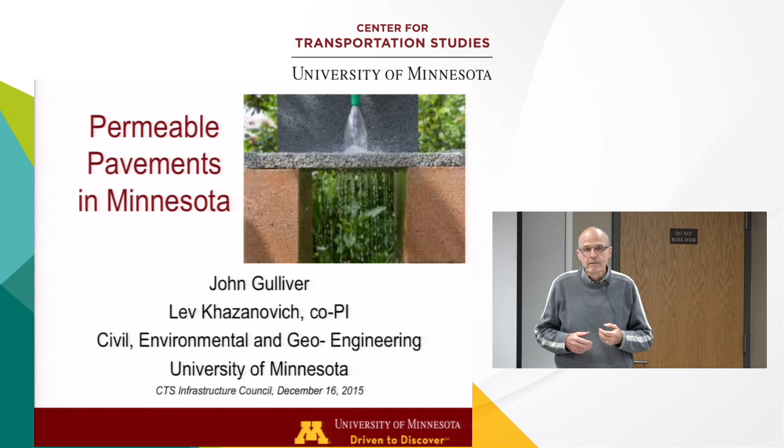I hope that what you're going to take away from this presentation is, number one, a well-designed, well-constructed, and properly maintained permeable pavement is definitely a possibility in Minnesota. We have examples of that. Number two, there are compelling reasons to use permeable pavements in Minnesota. Those two things I hope you take away. If you take nothing else away, that would be good. I'd be happy. So I'm going to give you a little bit of review. Many people know this stuff, but I'm going to give it to you anyway.

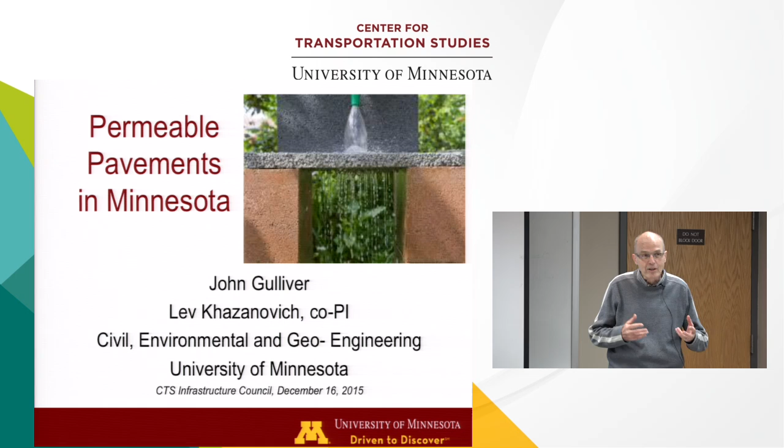I need to mention, Lev Khazanovich and I are co-PIs on this project. It's not just my project. Lev is here. He did the structural side of permeable pavements, and I did the hydraulics side, and we combined our efforts on the rest of it.

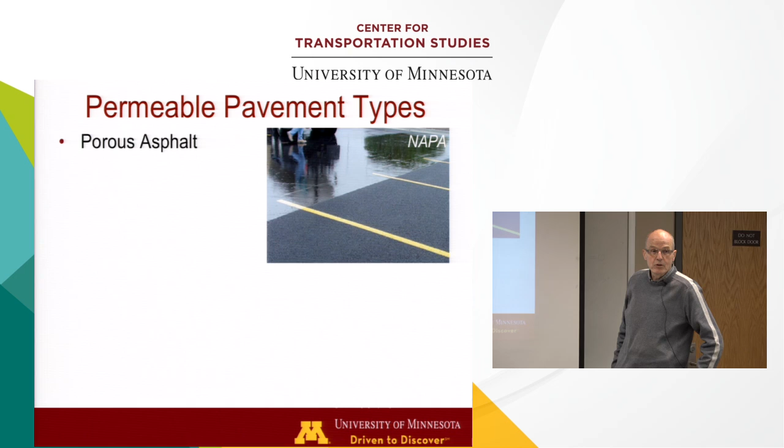So I like to talk about permeable pavements. There's porous asphalt, which is, I think, a little bit of a misnomer because all asphalt is porous, but that's what they use—they use the term porous asphalt. There is pervious concrete right here. I'll mostly be talking about those two.

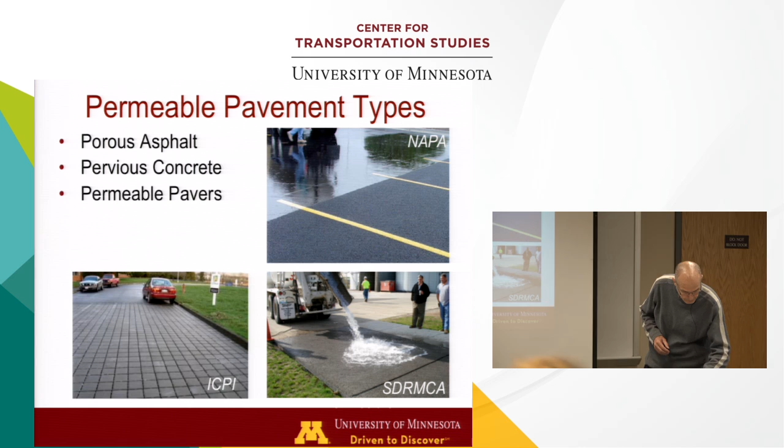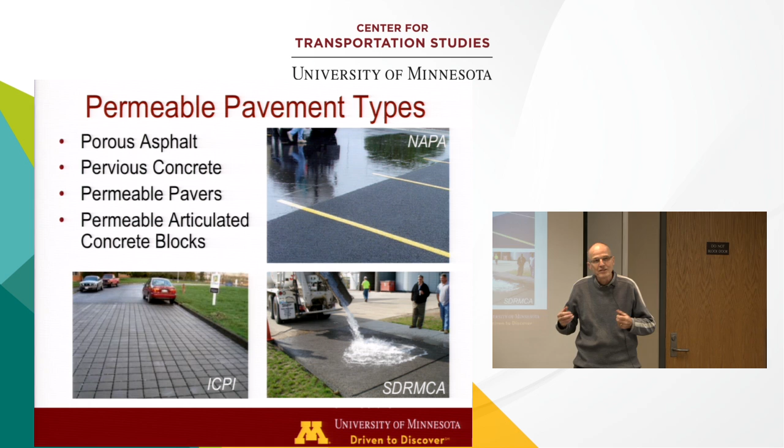There are permeable pavers where the spaces in between the blocks are filled with some sort of permeable material. And then a separate category is permeable articulated concrete blocks, which are just permeable pavers held together by some rebar. They're a separate category because in our project, we had someone from the Interlocking Concrete Pavement Institute, and they didn't want articulated concrete blocks to be part of it since they aren't part of the ICPI. So we gave them a special category—one way to solve that problem.

So, a cross-section of a full-depth permeable pavement. I like this picture because it's kind of descriptive—you can see the size of the car here. You have 2 to 4 inches of permeable pavement, with some aggregate underneath it. The water goes right through the permeable pavement quickly, hopefully quickly, into the aggregate, sits in the aggregate, and then soaks more slowly into the subgrade.

This filter fabric, I don't think, is really necessary. If you do need to use a filter fabric to keep the subgrade from moving into the aggregate, you probably want to make sure that it is fairly porous, because the last thing you want is filter fabric at the bottom of your whole system clogging. And so they always put filter fabric at the bottom, and sometimes I wonder why.

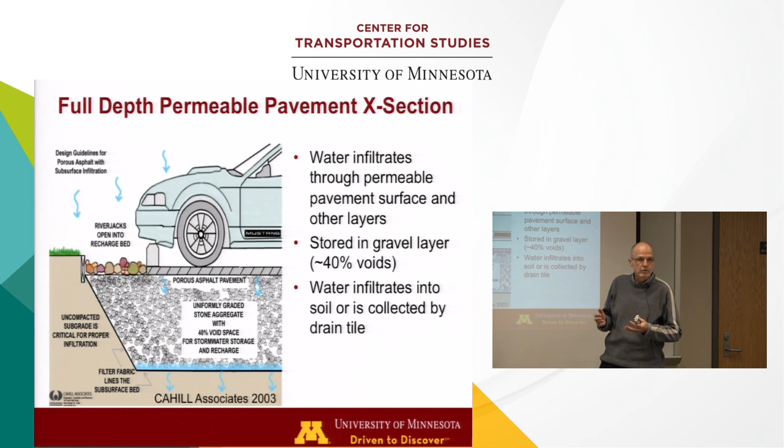The other thing about this is that you want to store, roughly in Minnesota, approximately 2 inches of water. Well, this looks like about 3 feet of stone here, at 40% porosity. But 2 inches of water only requires 5 inches of stone. So this—and typically people over-design the stone with 12 inches and sometimes 18 inches—is way too much stone. You need much less aggregate than that. It'd be about that deep, and that would still be an over-design, a conservative design.

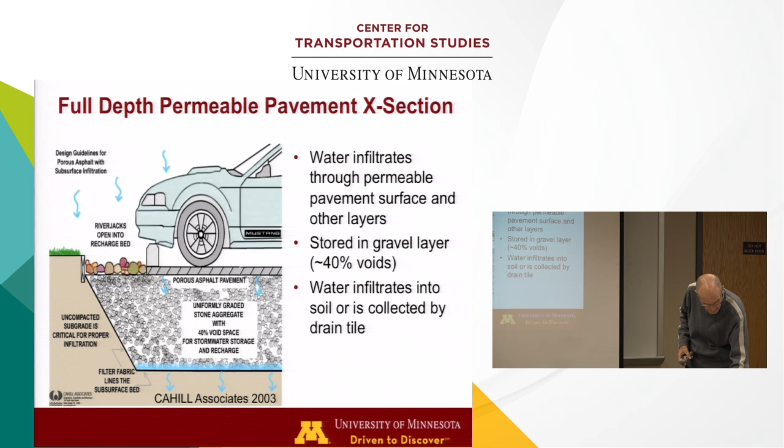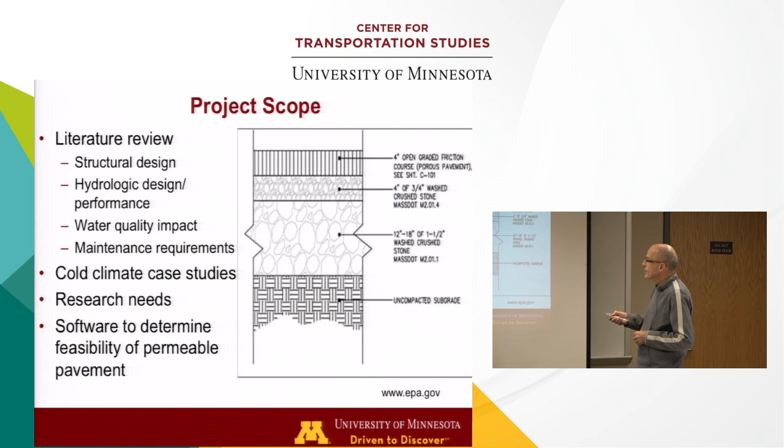So the project scope was we did a literature review, structural, covering all these topics. We did 9 cold climate case studies from the literature, and we found these cold climate case studies from interviews and talking to people. We published those, established some research needs, and developed software to determine the feasibility of permeable pavement. I'm going to talk mostly about these two: cold climate case studies and literature review, and move in some of the research needs where appropriate.

I'd like to talk a little bit about the benefits of permeable pavements. There are many of them, and they are significant. They're related to safety, water quality, noise reduction, and I'll talk about one a little bit more here.

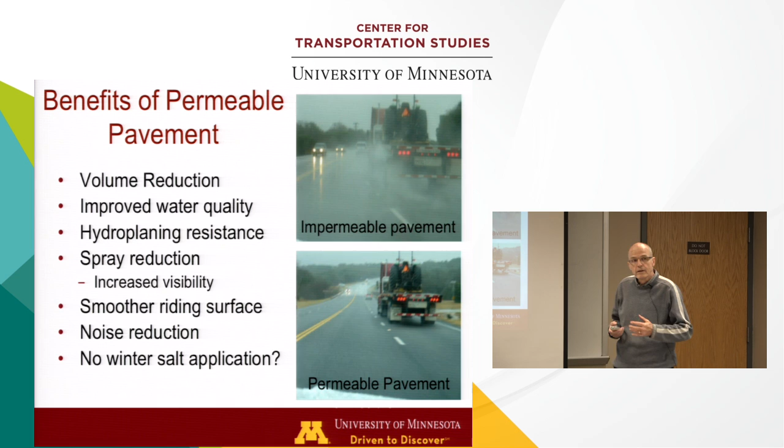Volume reduction is about volume of water quality. That's taking the pavement back to the way we handled water with forests and things like that. The water soaked into the ground and then moved through the ground to a stream or a lake, instead of hitting the surface and running into a storm sewer straight to the lake.

So it slows down the water quite a bit, and volume reduction is a big deal in stormwater pollution prevention. Improved water quality is pretty small, but you improve the water quality if you have water running off, by filtering a little bit of the particles.

Hydroplaning resistance is huge for safety. Spray reduction, you can see the spray reduction here. I hope you can see it because it's pretty substantial. You hear this truck, you can hardly see the truck with the spray, and here is on permeable pavement, it looks just fine.

It's said to give a smoother riding surface. I personally do not know that. I've never experienced that. I haven't experienced a less smooth riding surface, but I don't have any experience with that.

And it does have noise reduction. Noise reduction is substantial because the pores in the pavement absorb the tire noise. So it really has noise reduction. These are all reasons that apply across the country, and these are why it is implemented to a greater extent in the southern states, Texas, Florida, states like that.

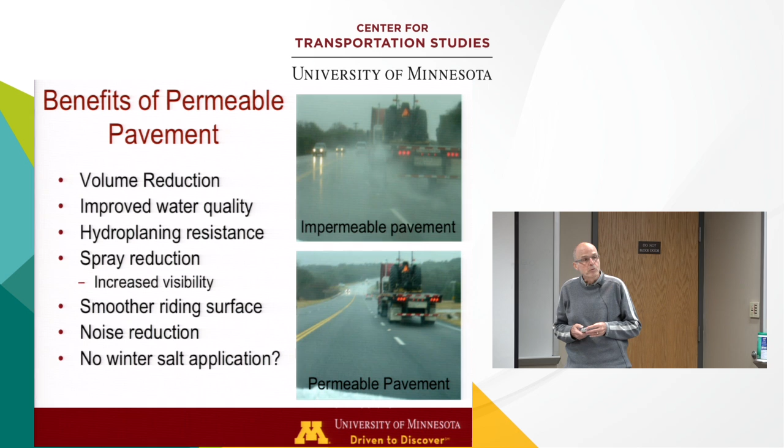So I'd like to start now with the keys to success. What we found as the keys to success are: first, a proven mix design - mix is always important, binders are very important. Proper construction is also very important. Good hydraulic performance, which is fairly straightforward and easy to take care of if you do your homework and due diligence. And proper and regular maintenance, also fairly easy to take care of if you're careful about it and you understand how to maintain these surfaces.

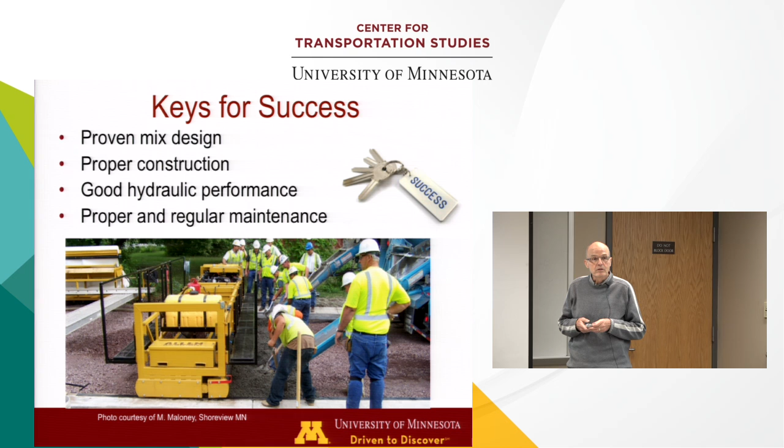Permeable pavements are a fairly new surface, as I'm sure all of you know, and so we don't have 50 years of experience with them. Everything that we do is going to be something a little bit different, a little bit new, trying out a new process. We don't have the proven technology of over 50 to 70 to 100 years. So to a certain extent, we are moving into a new technology. There will be failures and there will be successes. You have to expect that. You have to anticipate that.

In mixed design, there's less binder, so the binder is very important. You really want a good binder and want to improve binder performance. Maybe graphene will improve our binder - that's what two professors in the civil engineering department, Professor Leong, Professor Lee, and Professor Marasteanu are working on. Other improved materials to improve binder performance would be good. If you have asphalt, you need to consider low temperature cracking and rutting. For concrete, you need to consider freeze-thaw durability.

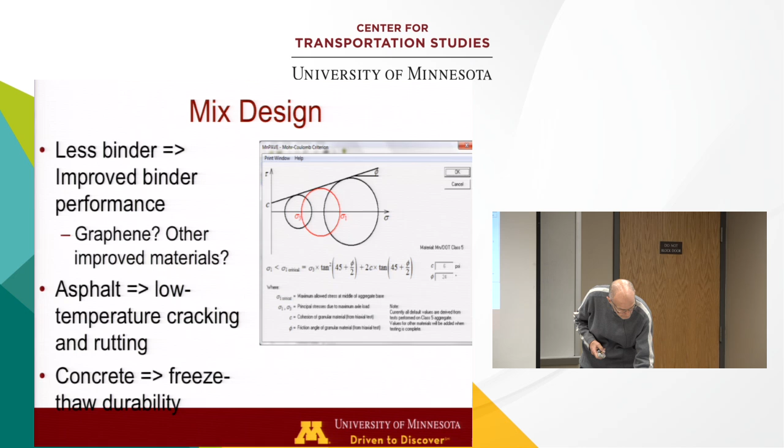Construction is an important part of the process, and you really have to be careful with some of these things. You have to be careful with the compaction. You don't want to compact the whole thing too much, and you don't want to compact even one layer with too much compaction because you lose your void ratio. You lose your voids, and if you have one small thin layer, that kills the whole process. So you want to make sure you handle the compaction properly, and you want the void ratio to be appropriate throughout the pavement.

Curing is very important for permeable concrete.

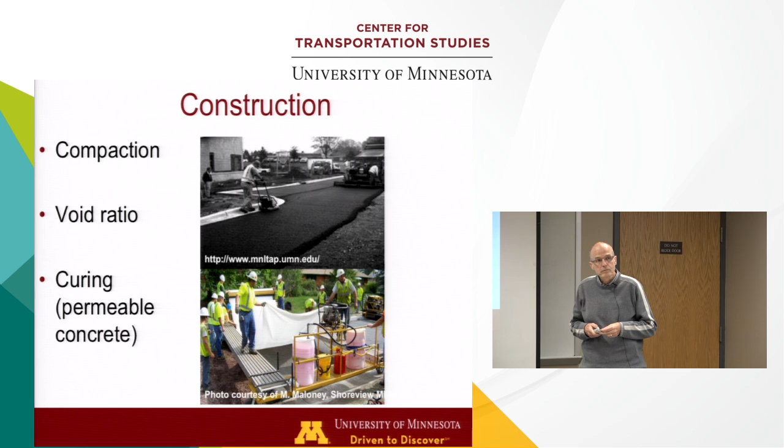Hydraulic performance is, I think, fairly straightforward, but maybe not, because pavements suddenly have a new thing, and that is they have to infiltrate the water down into the ground. So suddenly people who design pavements are talking about infiltrating water. We do know something about how water infiltrates.

Surface infiltration rates decrease over time, but are not rate limiting. Look at this permeable concrete right here - the water is pouring onto it, and the water is dripping right through.

Infiltration is maintained throughout the winter. That surprised me until I started thinking about it. It takes a lot of heat or a tremendous loss of heat to freeze water. Water doesn't freeze automatically. By the time the water moves through this permeable pavement, it's not going to freeze - I don't care what temperature you've got, if it's moving through. It will freeze if it's stuck there, but if it's moving through, it's not going to freeze. So if you keep things open and maintain it well, then you probably will not have a problem with freeze-thaw.

And the subgrade permeability is essential. You don't want to have a lake underneath your pavement. You want the water to be moving through and moving into the subgrade.

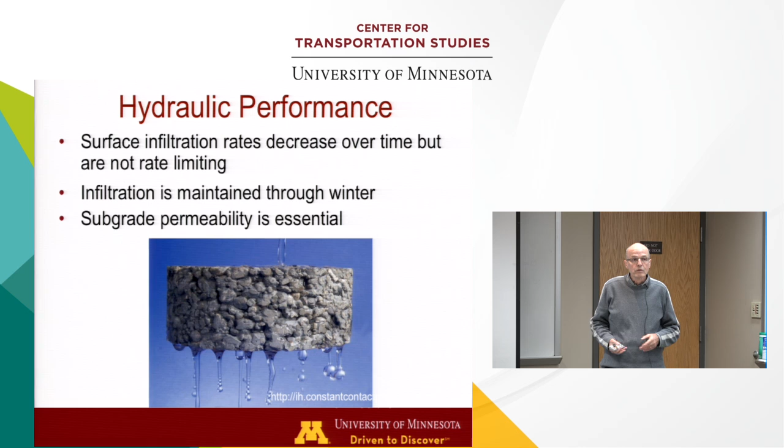Maintenance is not that much of a science, but you want to maintain it properly - there is a proper way of doing it. The major cause of clogging, what we found, is a reduction of void space, and that would be either through a heavy load on the permeable asphalt, or through organic particles, or through lack of maintenance.

And you want to minimize run-on - that would be run-on from other catchments. If you have another catchment that's kind of pointed towards your permeable pavement, you want to incorporate that into your analysis and probably try to eliminate it, because it will carry sediment with it, and the sediment could clog your pores.

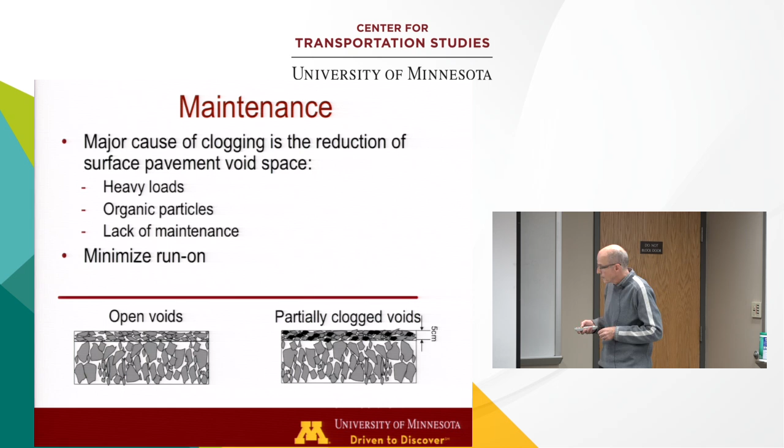You do not want to use a brush-only sweeper because it just moves things around and pushes it down into the pores. You want to pull that stuff up somehow. A regenerative air sweeper works by forcing air into the pavement and pulling it out - so it forces air over the pavement and then pulls it out, working with both pressure and a vacuum. A vacuum sweeper is just providing a vacuum.

You want to clean multiple times per year, but everyone should be cleaning their pavements multiple times per year, because whatever you drop, whatever falls on the pavement is going to end up in a storm sewer. That storm sewer is not the end of the line - it goes to a lake or a river or a creek. So what you see on your street ends up in our lakes, in our creeks. We want to clean that - we want to get it before it gets down to the lakes and the creeks.

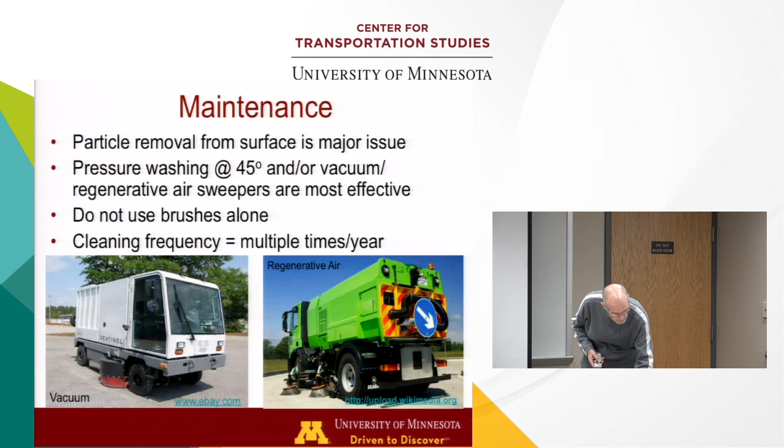That's something I wanted to point out here. So I'd like to go over some case studies.

We analyzed 9 case studies, through conversations, through looking at reports, looking at plans, and a number of things like that. They were pretty good case studies. We had 5 in Minnesota and 4 across the country: 1 in Toronto, 1 in the state of Washington, 1 in New Hampshire, and 1 in Denver, Colorado. I'm mostly going to talk about the top 3 here: MnROAD, the Woodbridge neighborhood in Shoreview, and the paired asphalt intersection in Robbinsdale. All of them will tell us something, they'll all give us some lessons learned.

And these are all successful permeable pavements. Actually, all of Minnesota has successful permeable pavements. We do not really have a big failure as of yet. Some are performing less well than others, but they're all performing, and they're still permeable.

So the MnROAD test cells were constructed in fall 2008, so it's 7 years since they were constructed. These numbered cells here are the permeable pavements on the low volume road. You can see the truck running around the low volume road, and these 2 here are on the main highway. They had permeable asphalt, permeable concrete, over a clay subbase and over a sand subbase, and a test section to compare with all 4 of them.

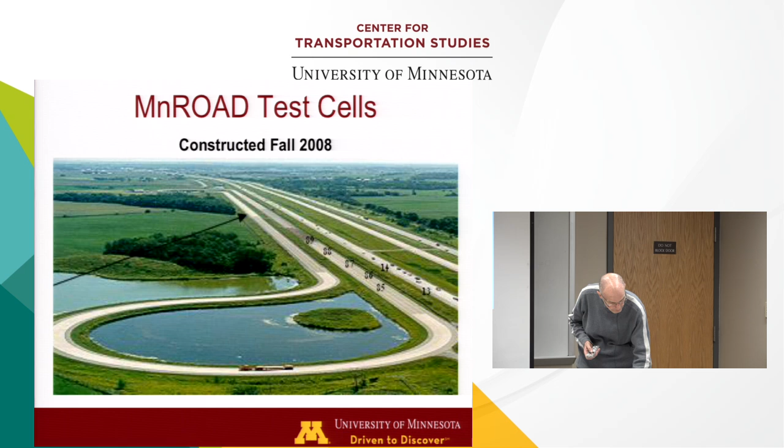So the lessons learned from the MnROAD test cells - I guess these are the ones that I thought were important. There were lots of lessons learned actually, but these are the ones that I thought were probably the most important or the most significant to me. The first was there's a reduced temperature gradient and less freeze-thaw cycling with permeable pavements. I found that to be interesting.

Secondly, vacuuming can reduce raveling. If you vacuum enough, you pull the particles out. Particles blocking the flow paths is one of the main causes of raveling on the surface, where the aggregate loses its surface cohesion.

A sandy subgrade seems to function better, and that's because you don't want a pool of water sitting underneath your permeable pavement during high rainstorms. And snow and ice appear to melt more quickly on permeable asphalt. Also an interesting conclusion.

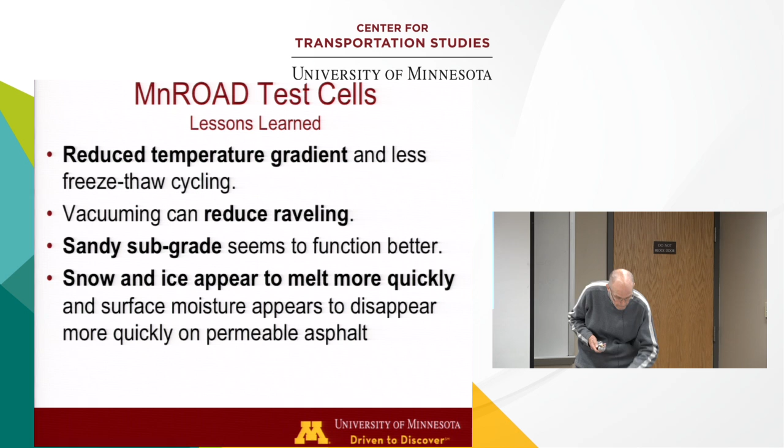The next case study is the Woodbridge neighborhood in Shoreview. It was constructed in 2009. Here you see people, the construction crews - obviously it was a case study for the construction team. You can see all the people around, and I don't think you normally have that many people laying some permeable pavements. But they brought a lot of people out, and they took a look to basically try different things and see how everyone else was doing it. And there are lots of engineers there seeing what's going on.

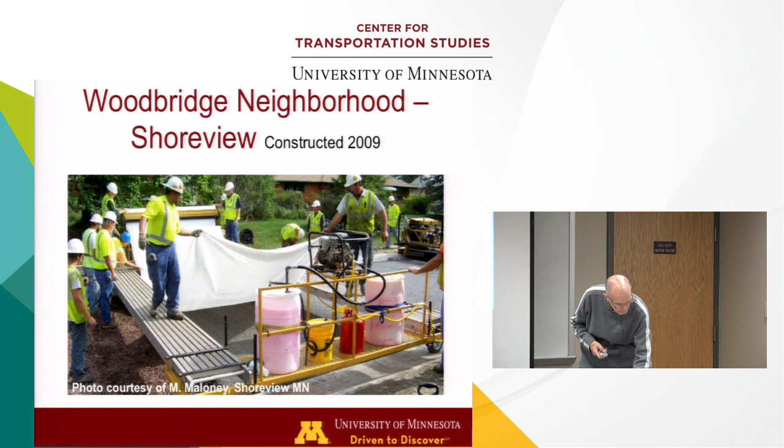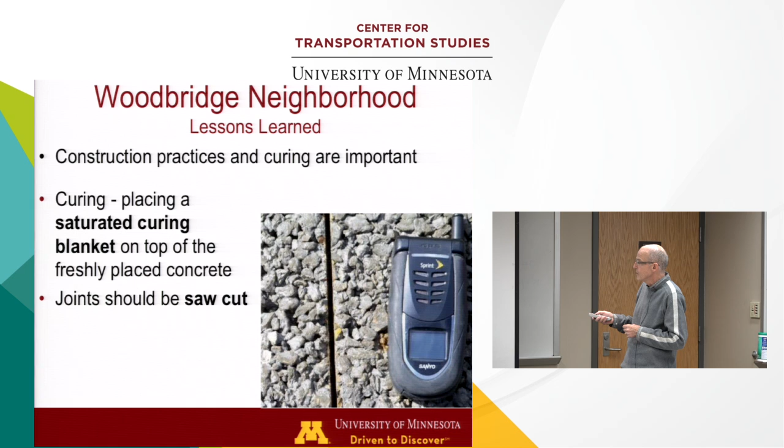Some of the lessons learned for the Woodbridge neighborhood are: first, construction practices and curing are important. This is for permeable concrete. For curing, an important item was placing a saturated curing blanket on top of the freshly placed concrete, which worked well. The concrete did not have any sort of cracking or spalling problems after that. And they specified - this is unusual, most people do not specify - that the joints should be saw cut instead of using a joint presser, instead of a press cut type of joint.

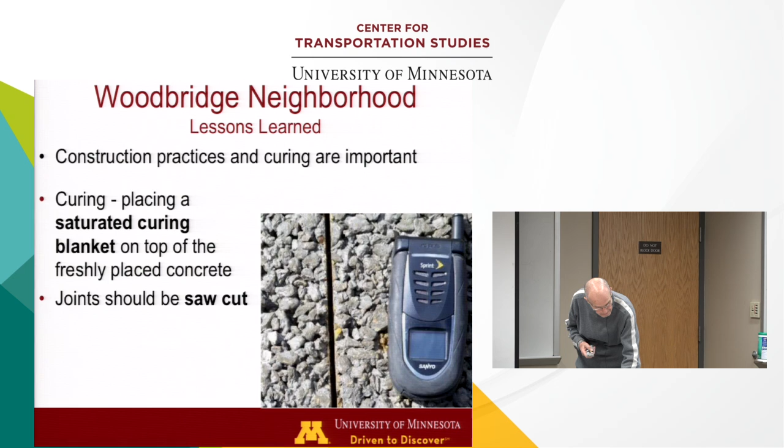They also said that the reservoir aggregate should be fairly large and angular. They maintain their infiltration capacity by air sweeping every 6 weeks with a regenerative air sweeper. They found that organics were the main source of clogging - that would be leaves, seeds, flowers from the trees. All those types of things were the main source of clogging.

And they found the clogging was typically in the top 1/4 inch of pavement. So it wasn't 2 inches, it wasn't 4 inches, it was just 1/4 inch, right on the surface. You just need to take that off with your regenerative air sweeper or your vacuum sweeper. And salt caused pavement degeneration in isolated areas. There are some areas where the salt was brought in through cars or through some other means, and it caused pavement degeneration, so you do not want to salt permeable concrete.

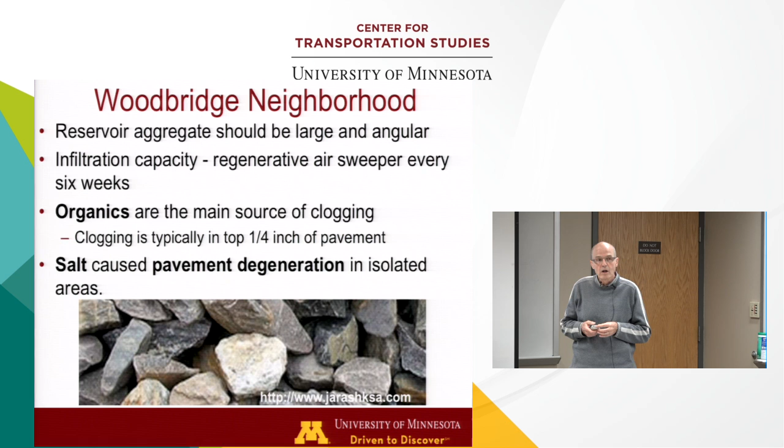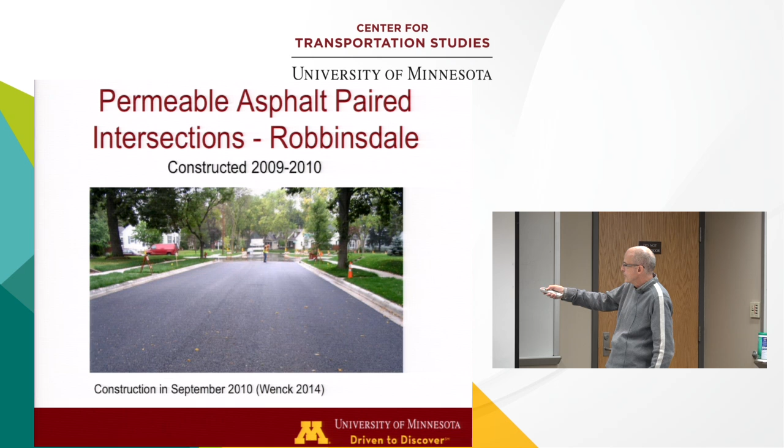Next case study is permeable asphalt paired intersections in Robbinsdale. What they did is they designed paired intersections. I'll talk about this. This is one shortly after construction. I don't know how well this shows up, but you can see it's raining over here.

They had a specific interest, and that was there's an impairment study for Shingle Creek watershed. They're in the Shingle Creek watershed district. And the impairment study said that to protect the fishery in the Shingle Creek watershed district, they have to reduce salt by 81%. That's substantial. That's shocking, actually. What are your roads going to be like with 81% less salt?

So they developed 2 permeable asphalt intersections, one over a sand subbase, one over a clay subbase. They were not salted during the winter, and they also identified 2 intersections that were replicates with them, except they were not permeable. The conventional asphalt sections were salted, so they're comparing unsalted permeable asphalt with a salted impermeable asphalt. That's the toughest comparison you can make.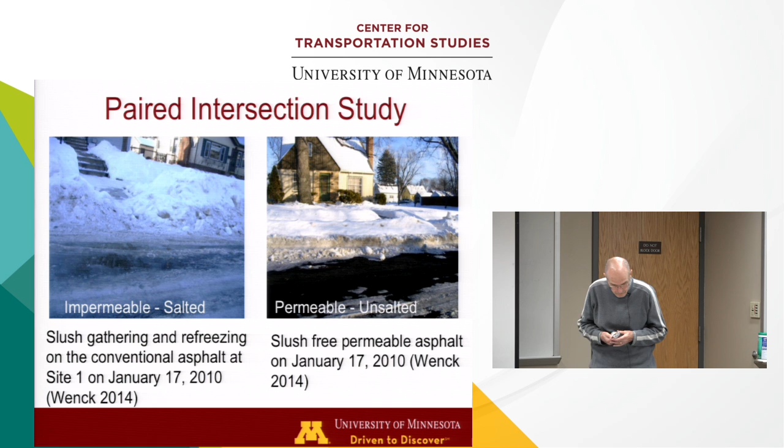But I found this to be a striking comparison. And actually for this watershed and for many watersheds in Minnesota, this is a comparison you want to make. If you have an impairment in your watershed that's telling you you have to reduce your salt eventually by 81%, well, this is the comparison you're making. Here is a non-salted, impermeable asphalt, and here is non-salted permeable asphalt. This is the comparison that you have if you have an impaired watershed. This is your choice.

So this is the main reason that I think permeable pavements should be coming to Minnesota. I think the salt and chloride issues are going to drive it.

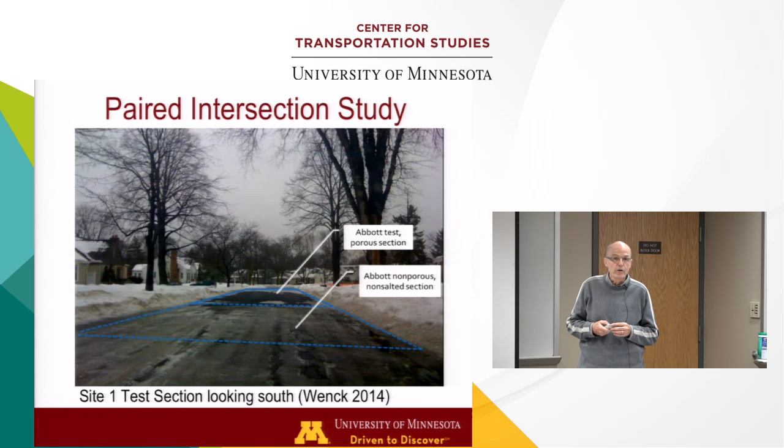So the lessons learned from this study was, first, there's a similar amount - that's how they stated it - of bare pavement compared to salted conventional asphalt sections. Once again, the permeability of the subbase was important. We're always comparing sand and clay. You know, there's lots of permeabilities in between sand and clay. So we're comparing sand over here and clay over here. This works better than this, right? Well, what about the sections in the middle? You've got a lot of permeabilities in between sand and clay.

So sand subgrade was more effective than clay for ice control. On clay, they had frequent overflows, and the water stayed longer in the clay. On sand, they infiltrated all the runoff, so the water would be moving through and then disappearing relatively quickly before it could freeze up. It'd get down to the area where temperatures were warmer because of the heat retained in the soil and the aggregate. Temperatures are warmer, it would sit there for a while, and then it would relatively quickly soak into the subgrade.

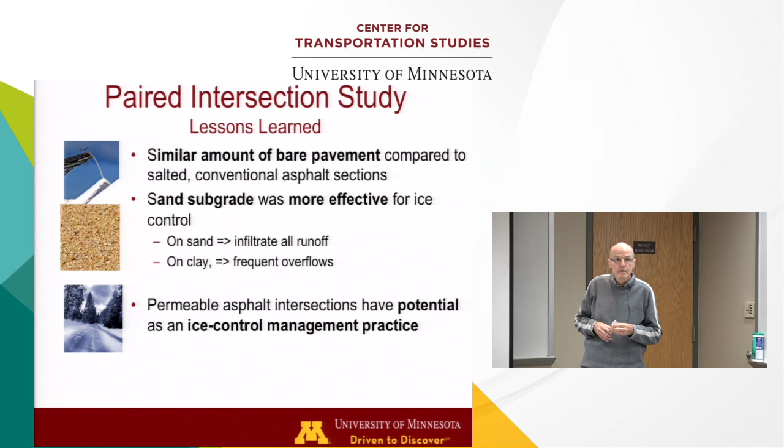So what Wenck said, when they did this study, is that permeable asphalt intersections have potential as an ice control management practice. We need to start working on this, start looking at it, start considering permeable pavement and its ability to control ice in the winter.

So, some conclusions. Construction, maintenance, and design are all critical to success. Design would typically be good, but construction sometimes is not considered carefully, and it's really important for permeable pavements. Maintenance is also really important, typically with vacuum or regenerative air sweeping.

Permeable pavements can withstand Minnesota winters. This was a surprise to us, even though we knew some of that before we started. We have five case studies, and all of them are withstanding Minnesota winters. It's really not a problem, even on clay, though there's a little more raveling on clay, but it's not that significant.

The other important thing is that permeable pavements can maintain infiltration rates throughout the winter, so they may result in lower salt application rates in the winter months. I believe they will, but I think this needs more investigation. So that's all I've got. What sort of questions can I answer?